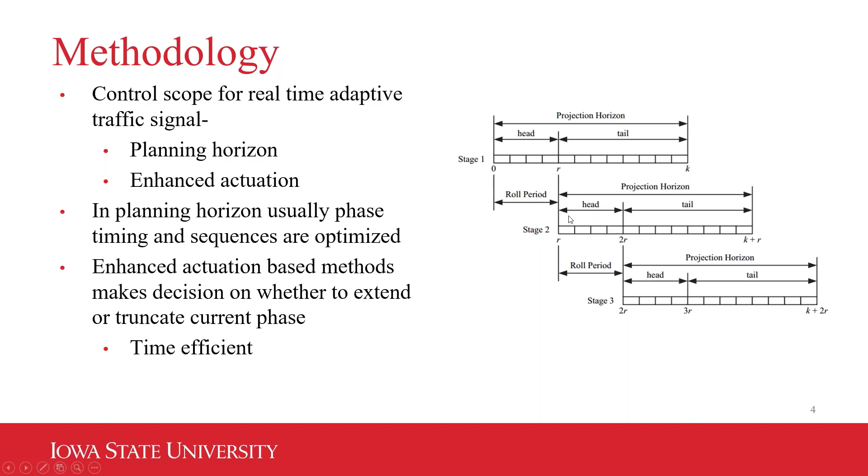For this purpose, we took one algorithm from the planning horizon domain and another one from the enhanced actuation domain. The phase allocation algorithm is from the planning horizon domain, originally developed by a group of researchers from University of Arizona. The enhanced actuation based algorithm is the self-organizing algorithm, developed by a group of researchers from Northeastern University. Both algorithms use an estimated arrival table.

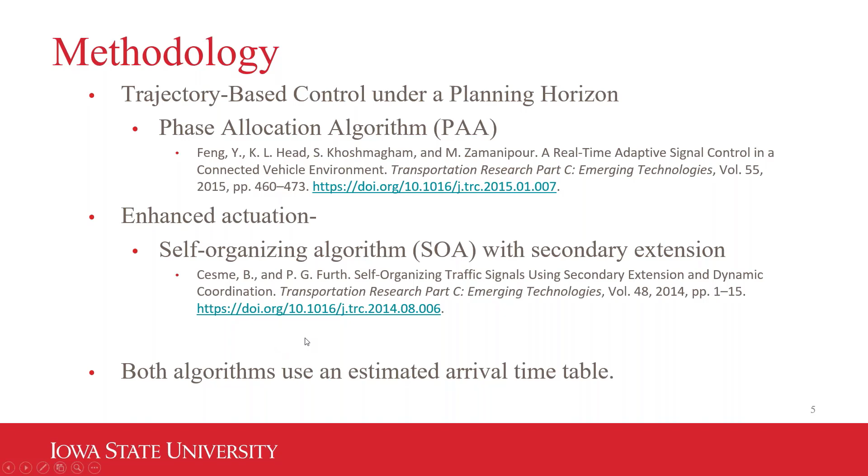The phase allocation algorithm is basically a bi-level optimization where in the upper level a dynamic programming approach is used. The dynamic programming approach in the upper level sends barrier length information to the lower level function, and in the lower level function, based on the barrier length, it optimizes the phase duration and phase sequences, and sends this back to the upper level program, which also stores this information.

Later, a backtracking algorithm is used to retrieve the optimal plan. The phase allocation algorithm has a planning horizon length of 2 cycles, but the head part is actually limited to the first barrier length, so the algorithm runs once per barrier. For the phase allocation algorithm, coordination is considered as a fixed priority request.

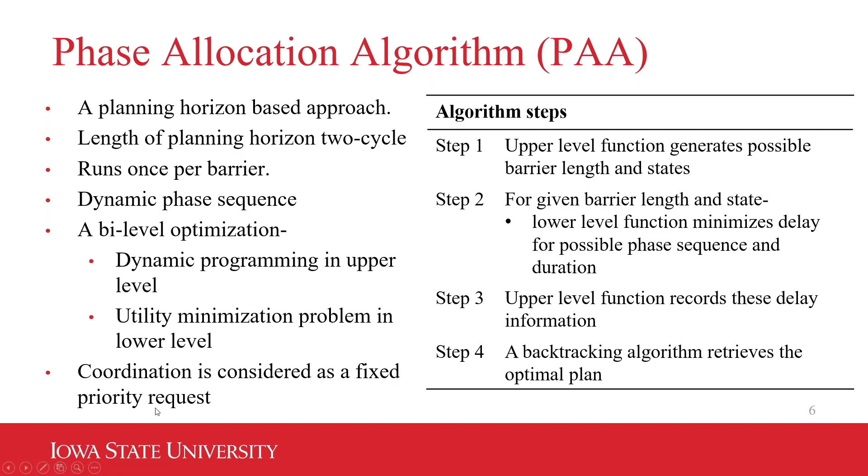The self-organizing algorithm has two parts: it is actually based on an efficient actuated control, and later it allows secondary extension for progression along the arterial. To make the actuated control more efficient, we have used advanced detectors along with stop bar detectors. We also used minimum green time, maximum green time, lane by lane detection for gap out logic, non-simultaneous gap out, and flashing yellow arrow for backup prevention.

For the self-organizing algorithm's secondary extension part, it allows platoons in the major arterial an extension period when the major arterial gaps out. What is happening here is that it is basically taking some time from the non-arterial phases and allowing this time to the arterial phases. This causes a very small delay in the arterial phases, but makes sure that the arterial platoons don't have to wait for a very long red period. So this is the main idea.

The larger and denser the platoon, the more likely it is that they will get a secondary extension. The possibility of allowing a secondary extension depends on the number of vehicles, headway, volume saturation ratio, and cycle length difference between adjacent intersections.

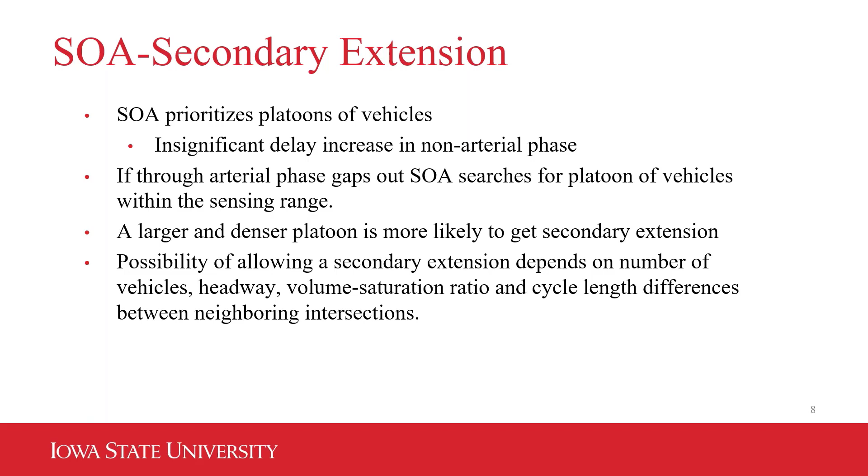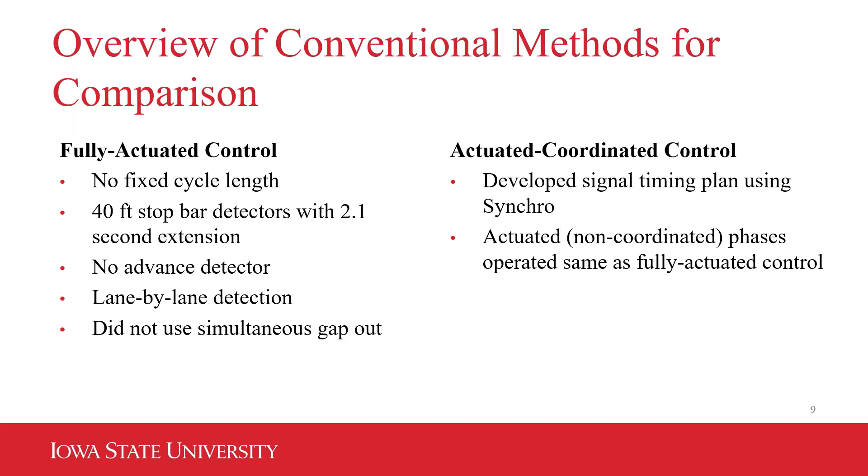We also compared these advanced algorithms with conventional algorithms like fully actuated control and actuated coordinated control. In the fully actuated control, we didn't use any advanced detectors, and the actuated coordinated control timing plans were optimized through Synchro.

We implemented these ideas on a 3 intersection corridor in Vissim. All three intersection corridors were 8-phase, and all the left turns were protected permitted. Algorithms were coded in Python using the COM interface, and virtual ASC/3 controllers were also used, with calls placed via detector channels through COM.

To implement the self-organizing algorithm, it was basically the ordinary fully actuated control, and dummy detectors were also used to hold on phase calls. For the phase allocation algorithm, the timing decisions were supplied by the phase allocation algorithm itself.

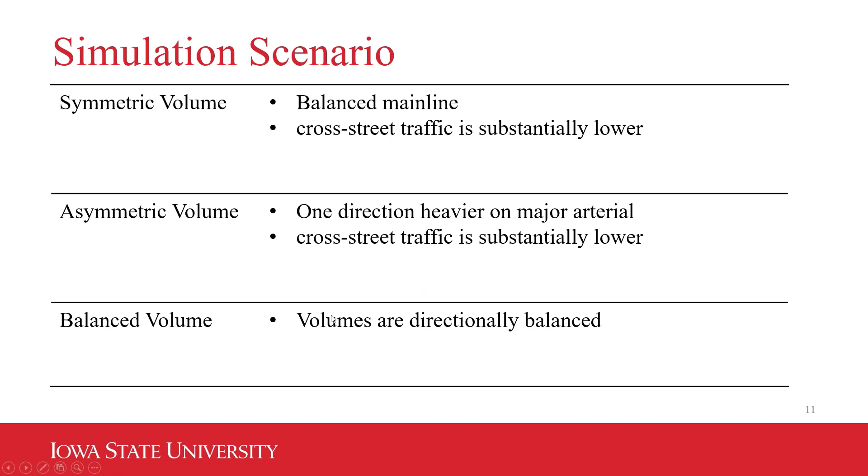We also used 3 different volume scenarios. The first one is the symmetric volume, which uses a balanced main line, and the cross-street traffic is substantially lower. In the asymmetric scenario, one direction is heavier than the other in the major arterial, and cross-street traffic is again substantially lower. In the balanced volume, the cross-street traffic and the mainline traffic are quite similar.

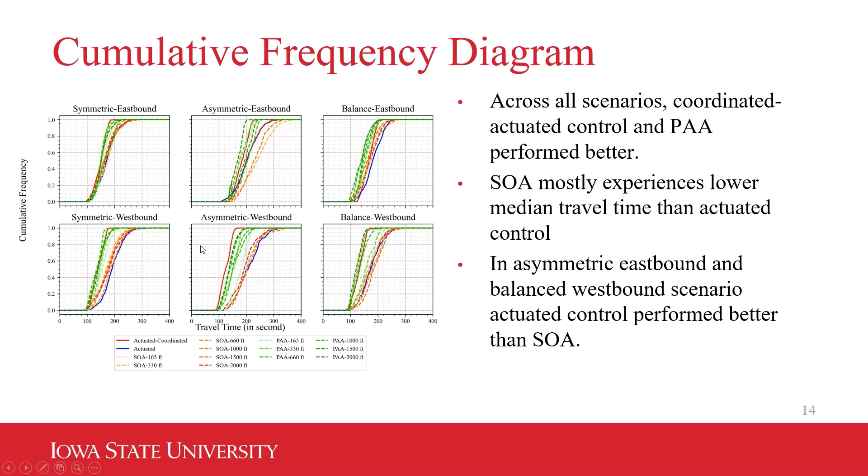Our final finding is that the trajectory-based signal control method actually performs better with increased or higher sensing ranges, but occasionally we found some inconsistency. With lower sensing range, both algorithms were actually underutilized. But above 1,000 feet, both algorithms perform better, though which one is actually better between the two depends further on the volume configuration. Above 1,500 feet, both algorithms converge or show little benefit with increased range.

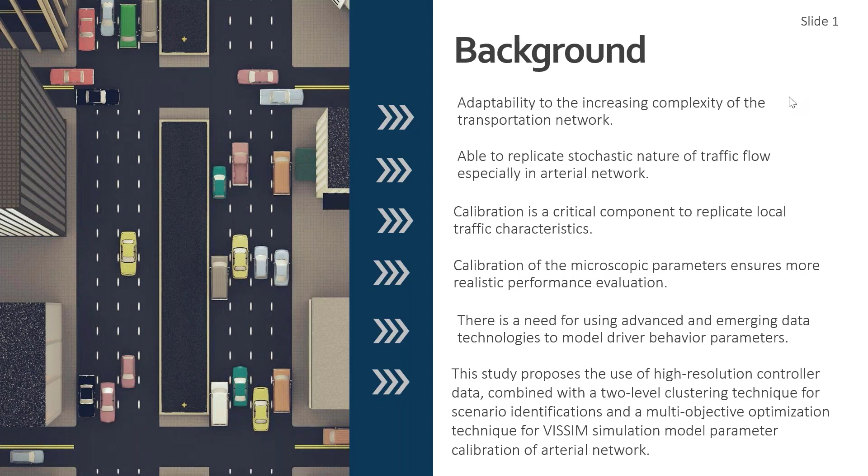So we use emerging data sources such as high resolution controller data, which is event-based data, and the data resolution is 0.1 second. That means every 0.1 second we get a status of the field condition, especially the signal condition.

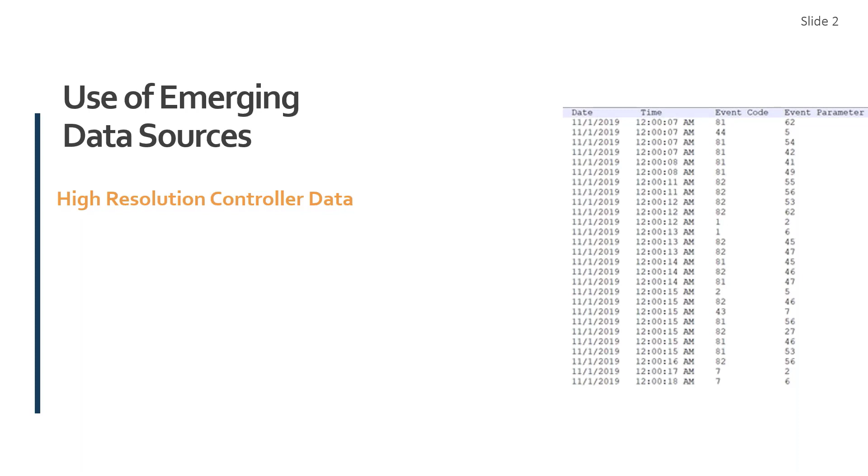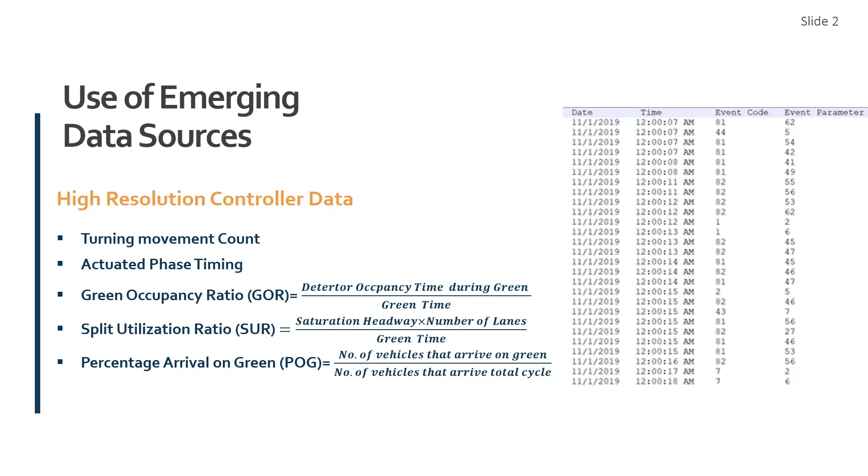The conditions are coded in two parameters: one is event code and the other is event parameter. From there we can access different kinds of performance measures of the signal controller, such as turning movement count, actuated phase timing, green occupancy ratio, split utilization ratio, percentage arrival on green, and many others.

So utilizing these performance measures, we first separated the actual field traffic condition using a clustering method. The clustering method was performed in two level clustering.

First, the 24-hour travel time data was categorized, and from there we see that peak hour, off-peak hour, midnight, and midday scenarios are separated.

For each scenario, for example maybe peak hour data, we again clustered them based on green occupancy ratio we derived from the high resolution controller data.

These clusters also have another level: first it was through-movement clustering, and then for each through movement the cluster was based on the left turn movement, so that each pattern has a distinctive field scenario showing how much the left turn or through movements have green occupancy ratio.

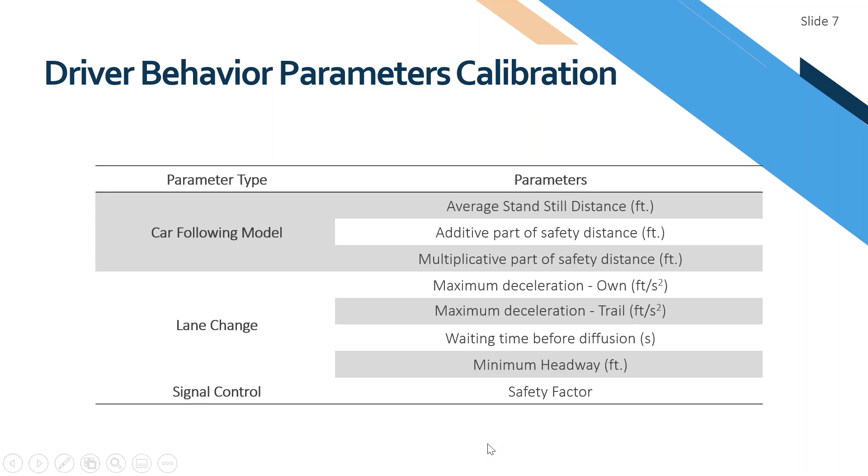So for the arterial we calibrated the following driver behavior parameters, and these parameters were calibrated by using the objective function of travel time difference.

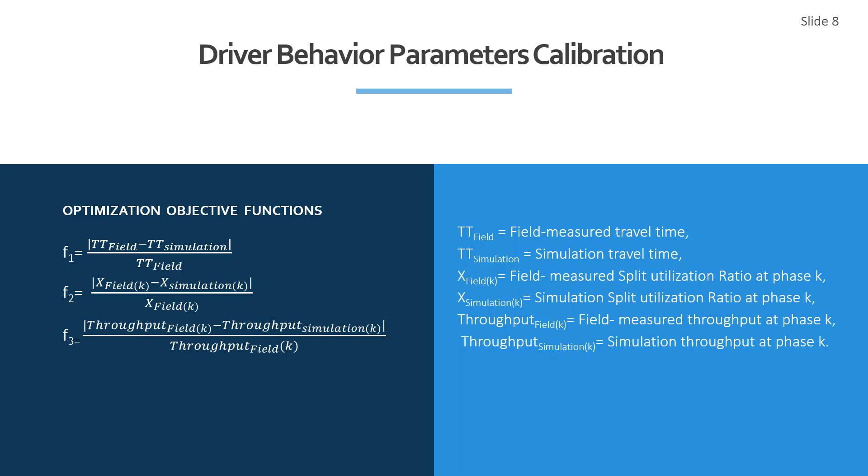We wanted to minimize the travel time difference between field and simulation, also the split utilization ratio and the throughput from field and simulation. When we use the genetic algorithm, we only use travel time, but for NSGA3 we used all three of these objective functions to calibrate the driver behavior parameters.

This is the step-by-step process of NSGA3. We initialize by creating the population, and we run the simulation for individual population.

All of these were done by using COM interface, and we take the output from the simulation and compared it with the field data and get the fitness value. Fitness value was the main result of the objective function, and we run the NSGA3 algorithm for like 100 generations.

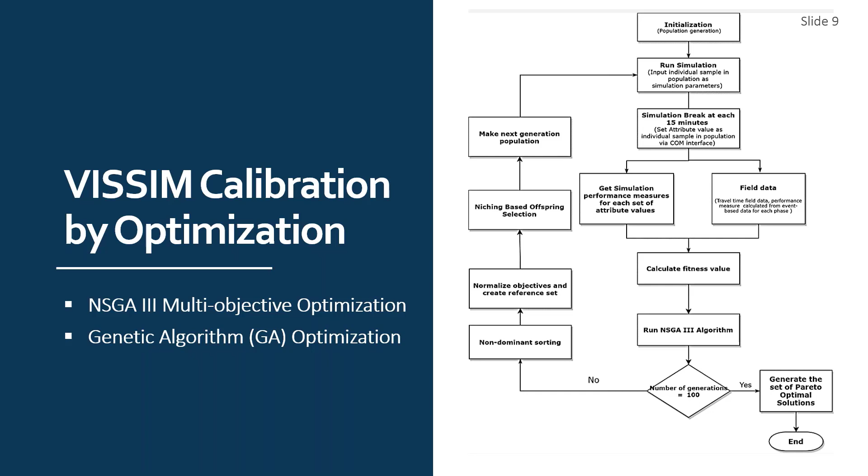NSGA3 algorithm gives us the Pareto optimal solution. Pareto optimal solution is the trade-off between all of the objective functions, that which one we want to minimize. It is not a fixed value, but several values of the minimal function. So after that, we validated the VISSIM model based on green occupancy ratio and percentage arrival on green.

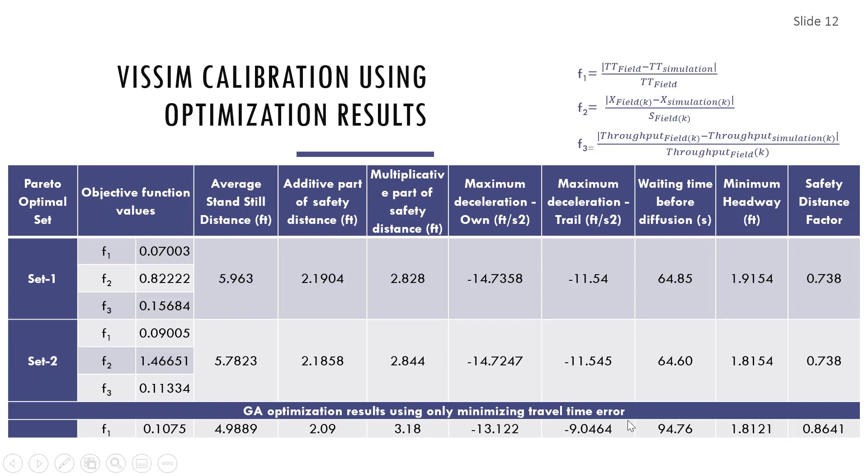And we also use the genetic algorithm for only travel time, and we have the value here and the travel time error, and also the driver behavior parameters for this algorithm.

And the calibration model actually shows that the NSGA sets, set 1 and 2, especially set 1, gives us better result in terms of error. It minimizes the error of the field data and the simulation data more.

And genetic algorithm only, but in terms of travel time, genetic algorithm works well. But when we see the other parameters like split utilization ratio, genetic algorithm does not give us good result.

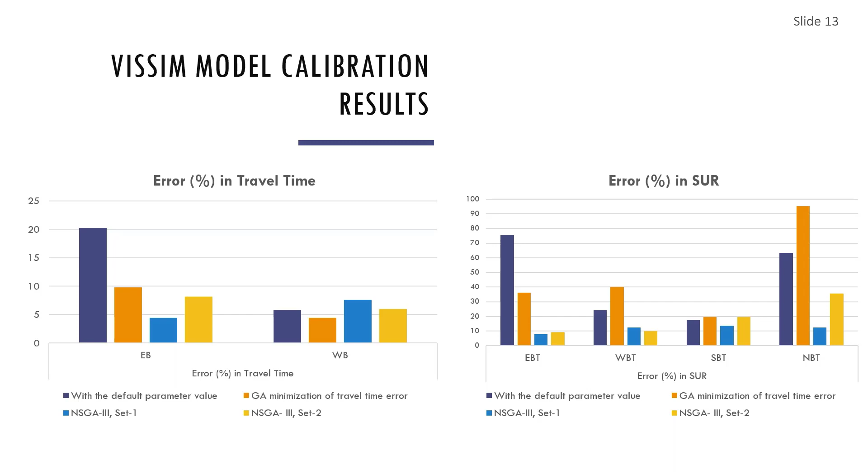In that case, NSGA-III set 1 and 2 is better in terms of calibration results, and also in terms of validation result, which was based on green occupancy ratio and percentage arrival on green. We see that the NSGA-III sets are giving us better results in terms of error in green occupancy ratio and percentage arrival on green.

So this method actually uses existing and emerging sources and optimization method to calibrate the VISSIM RTL network. And this paper uses the microscopic signal timing performance measures for driver behavior parameter calibration, only the signal timing performance measures.

When we compare the single objective optimization with the multi-objective optimization, we say that we have lower travel time error for both of the cases, but multi-objective optimization gives us significantly lower error for high resolution controller traffic data measures, the performance measures.

That is all. Thank you, everyone.

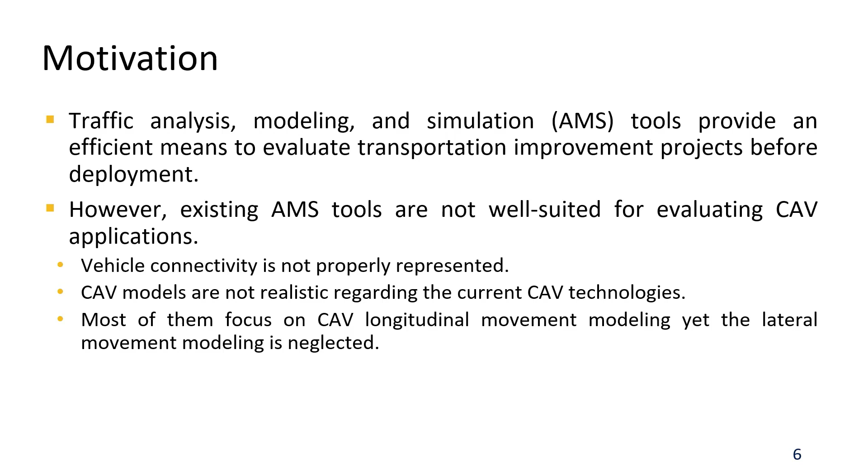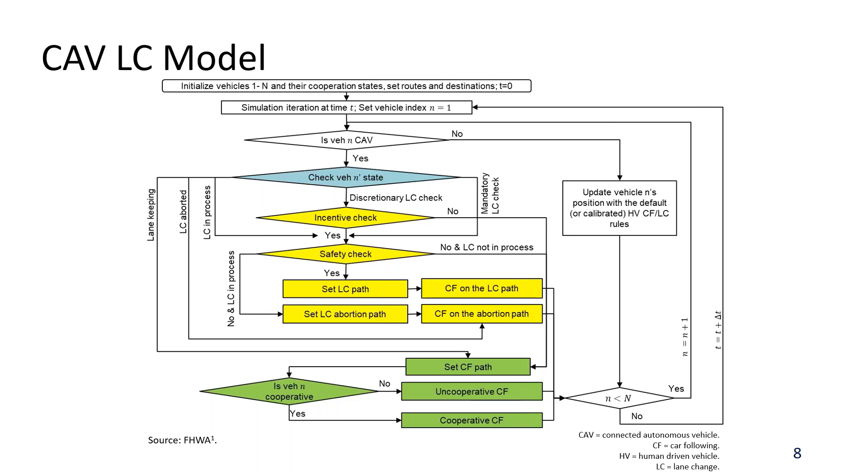So we propose this mixed traffic simulation framework, this flowchart here, and the key component is the CAV lane change model, as highlighted in this shadowed figure here. I won't bore you with the details, but I do want to highlight some features that we propose.

The first thing I want to introduce is called the cooperative state. This state is defined for CAVs. So if the CAV is uncooperative, then during a car following process, the CF here means car following, the CAV will only follow the preceding vehicle in the current lane, regardless of the lane changing signal or whether the preceding CAV is in the neighboring lane, as shown in the left figure.

But if the CAV is cooperative, then in the CAV's car following, it will follow not only the current preceding vehicle 1, but also the preceding vehicle in the neighboring lane with the lane changing signal on, which is vehicle 2 in this case, as shown in the right figure.

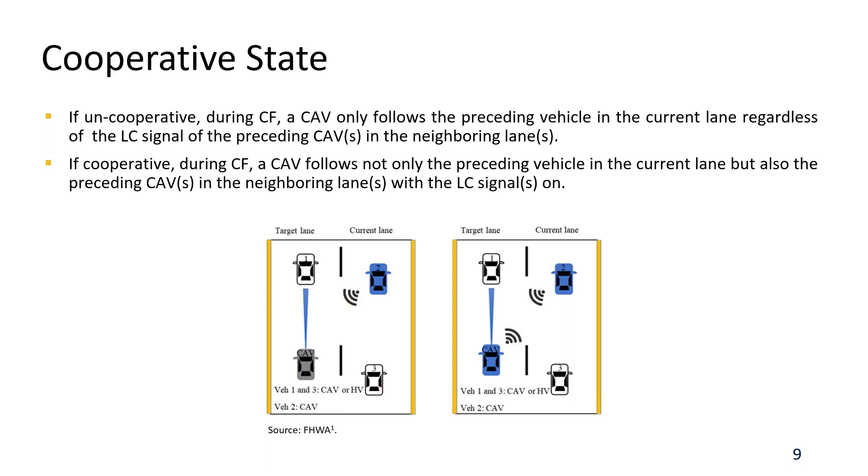And now we talk about the lane change. A lane change for the CAV is initiated when the first two criteria are met. The first one is called the incentive criterion with respect to vehicle 1 and vehicle 2. If this criterion is met, the CAV can travel faster following vehicle 2 rather than following vehicle 1. I want to point out this incentive criterion is only defined for discretionary lane changes. The second criterion is called safety.

It is defined with respect to CAV and vehicle 3, and it is defined for both mandatory lane changes and discretionary lane changes. Basically, it requires that it is safe for the CAV to make a lane change, and it is also safe for vehicle 3 to accommodate this lane change.

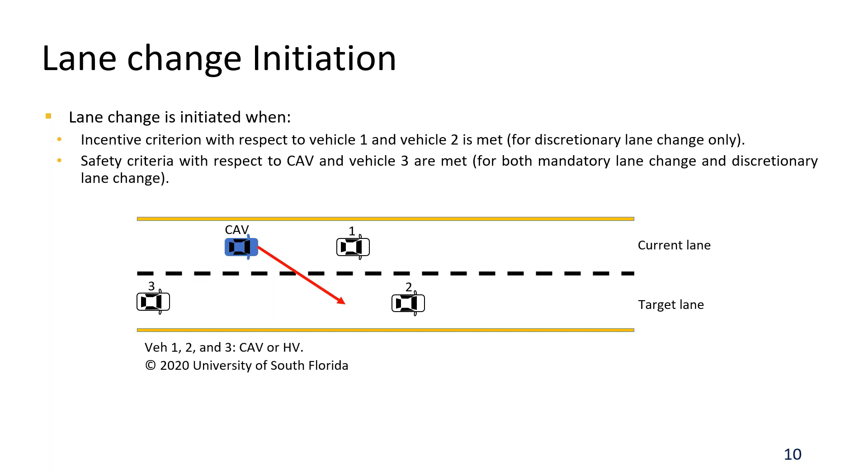If these two criteria pass, then the CAV will make a lane change to the target lane. The safety criteria, as introduced before, are assessed continuously with respect to both CAV and vehicle 3. And if this criterion is met, then this lane change will continue.

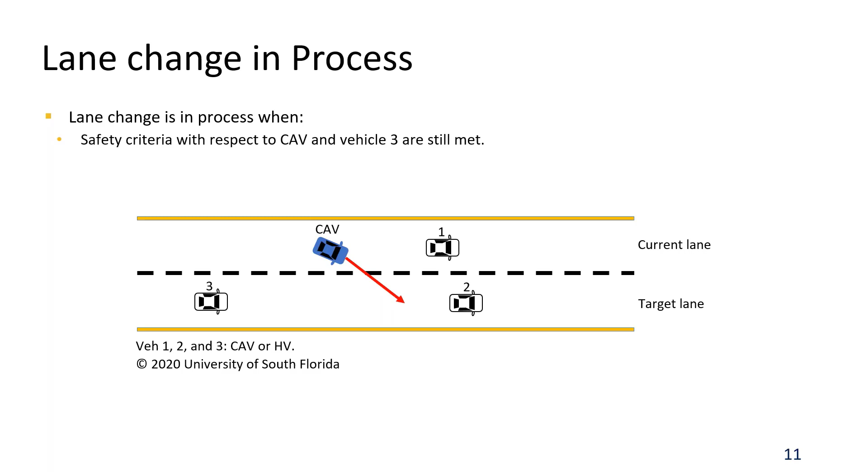This means the CAV will keep in the designated lane change trajectory and make the lane change. But if the safety criteria fail with respect to either CAV or vehicle 3, then the CAV will abort this lane change. In this case, if the safety criterion with respect to vehicle 3 fails, the CAV will go back to its original lane. This is modeled for safety consideration.

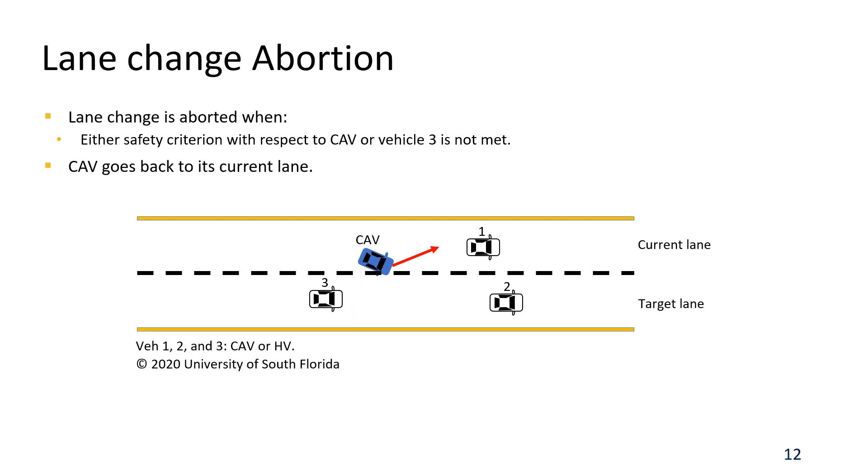For each case, we have two sets of data. The first round of data is used for model calibration, the model that we just proposed, and the second round of data is used for model validation.

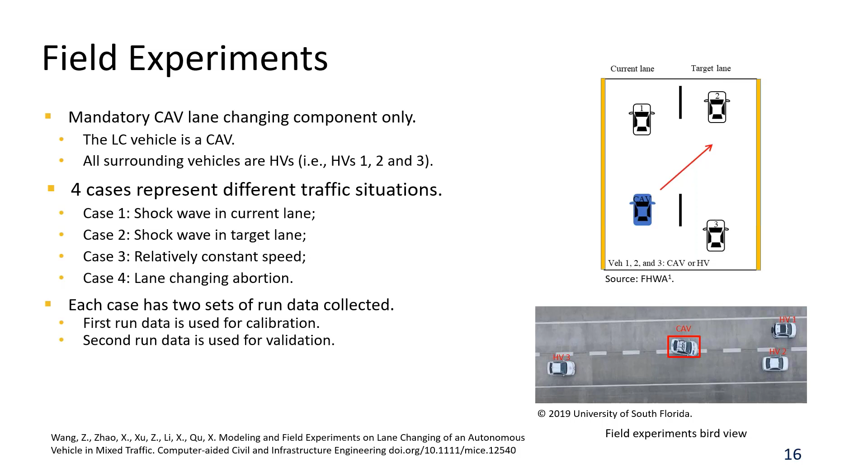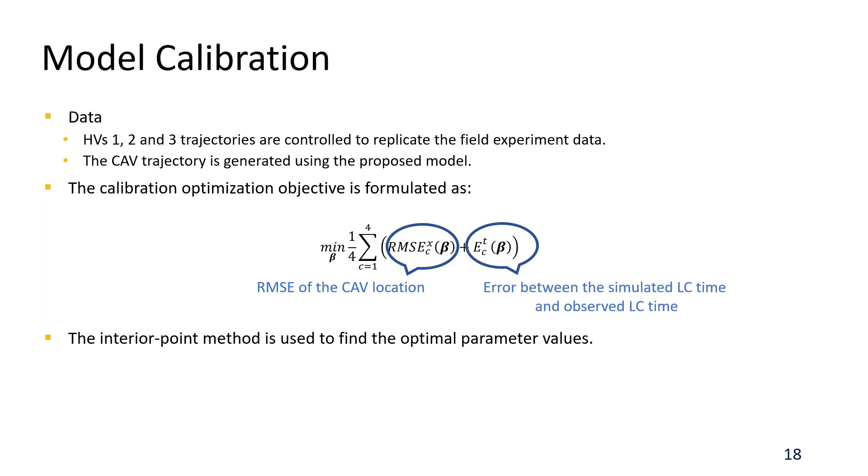For the model calibration, all the human-driven vehicle, or HV, trajectories are controlled to replicate the field experiment data, but the CAV trajectory is generated using the proposed model. The calibration optimization objective is formulated as the sum of two terms: the first term is the RMSE value of CAV location, and the second term is the error between the simulated lane change time and the observed lane change time. We use the interior point method to find the optimal parameter values.

After calibration, we move to model validation, which means we use the second round of data to do the validation. Still, like the calibration, we control the human-driven vehicle's trajectory, but we generate the CAV trajectory with the model. And we calculate CAV location and speed.

The two figures below are actually the validation results of case 1. So still, we see the observed trajectory. The pink curves are quite close to the black dashed curve, which is the validated data trajectory for the CAV. So vehicle location RMSE is only 1.55 meters, and vehicle speed RMSE value is only 0.25 meters per second.

Here is the summary of all 4 cases. I also want to point out that, compared with model calibration results, the validation results show less difference, which means we conducted a valid model calibration.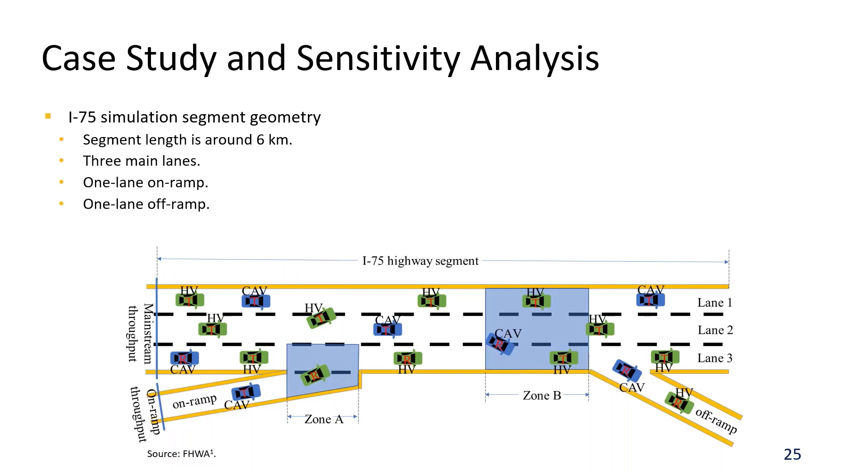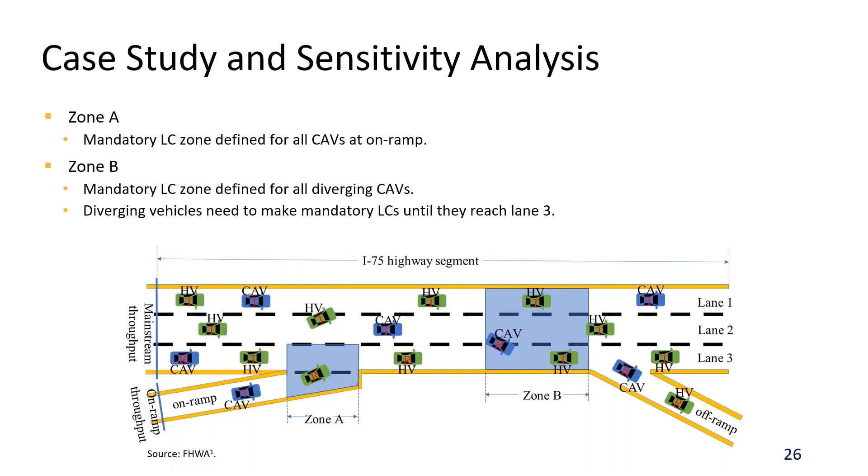We defined 2 zones. The first zone is called Zone A. It is a mandatory lane change zone for all CAVs at the on-ramp. Zone B is a mandatory lane change zone defined for all diverging, or exiting, CAVs. Diverging vehicles need to make mandatory lane changes until they reach lane 3. This is a screenshot of our simulation in PTV VISSIM.

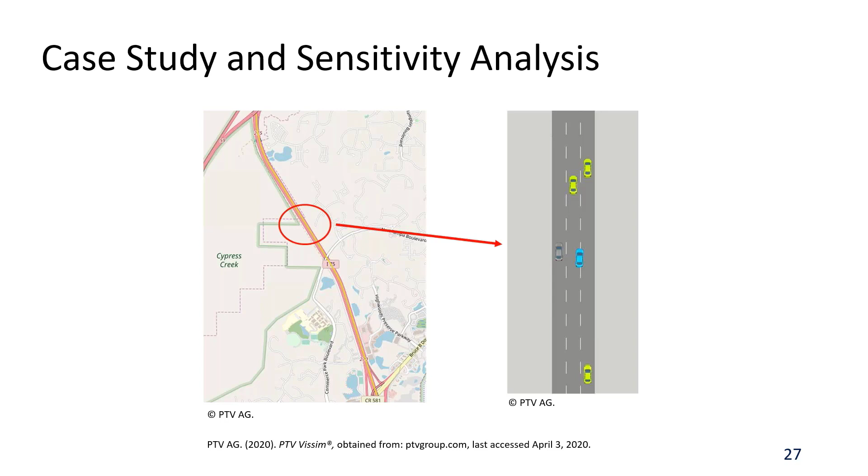We conducted a set of sensitivity analyses regarding various key parameters. For the sake of time, I will only present the results regarding CAV cooperation rate, which was varied from 0, meaning no cooperation at all, to 1, meaning all CAVs will be cooperative.

Let me first introduce a few measurements. We use three: average speed, an indicator of traffic mobility; vehicle speed standard deviation, an indicator of traffic stability; and traffic flow rate, another mobility indicator.

The results show that as the CAV cooperation rate increases, performance in both stability and mobility first improves until the cooperation rate is about 0.5, then decreases as the cooperation rate further increases. The reason is that initially, more cooperative traffic increases the chances for CAVs to complete lane changes, reducing the impedance from lane changes. But as the cooperation rate further increases, cooperative CAVs increase the average gaps between vehicles, which may slow down the traffic.

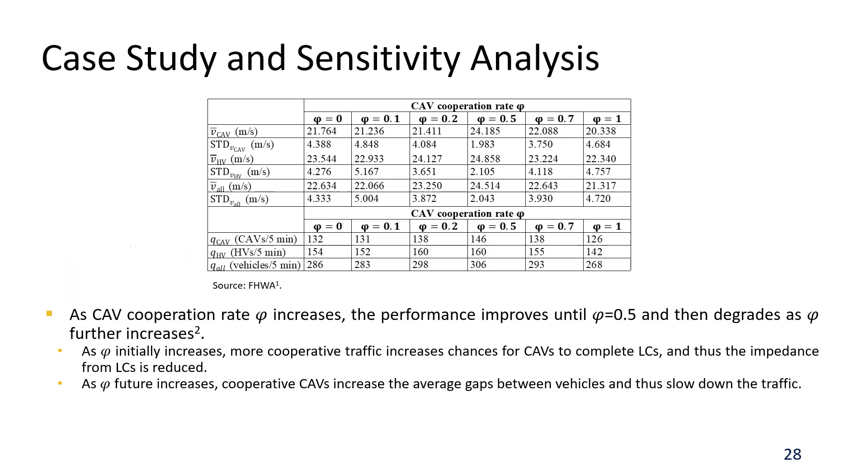It is the CAV lane change study that got us thinking: what is the difference between a human-driven vehicle following an AV versus following a normal human-driven vehicle? To test this question, we conducted another set of experiments to see how human-driven vehicles react to CAVs or AVs.

The results show that in the first scenario, the conspicuous CAV scenario, human-driven vehicle behavior model might be different in mixed traffic compared with existing traffic. This means in future modeling work, if CAVs or AVs are apparently different from human-driven vehicles, we may need to modify the human-driven vehicle car-following behavior to be realistic. In the second testing scenario, the inconspicuous CAV scenario, the existing human-driven vehicle car-following behavior can still be applied to mixed traffic.